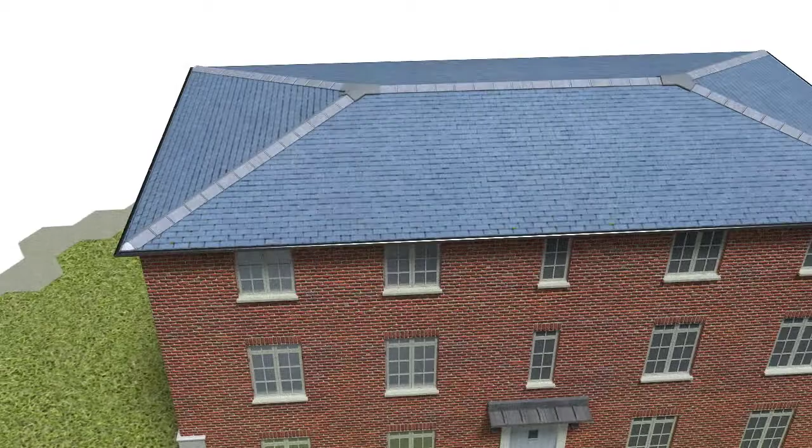Installing a high-performance structural floor is quick and simple when you use TETRiS insulation blocks developed by Cellecta and precast concrete beams manufactured by Charcon. Build up the foundation walls to the desired height. Install a damp-proof course below the beams.

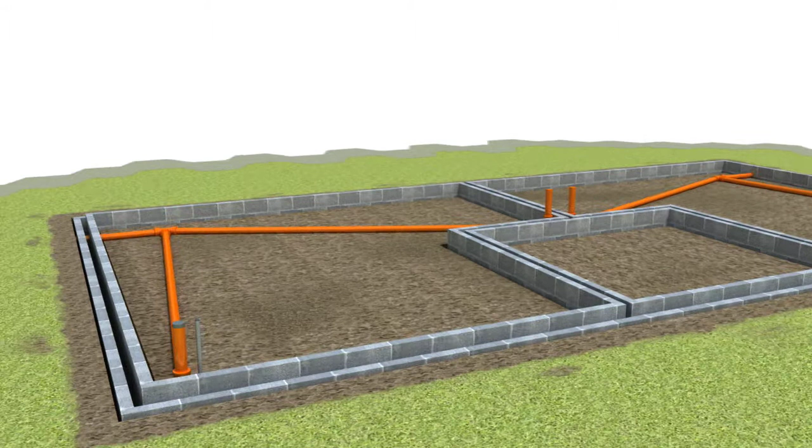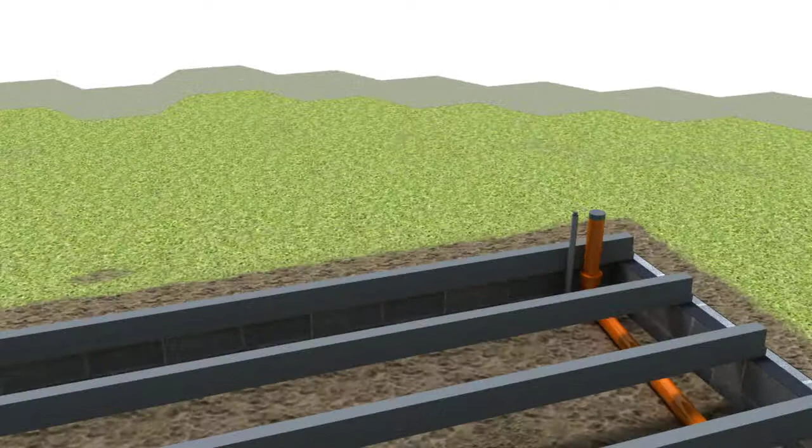Using the Charcon beam layout plan provided, carefully place the Charcon beams across the floor at the appropriate centers. In accordance with the layout plan, start with a full TETRiS T-block. Cut out holes for service with a handsaw.

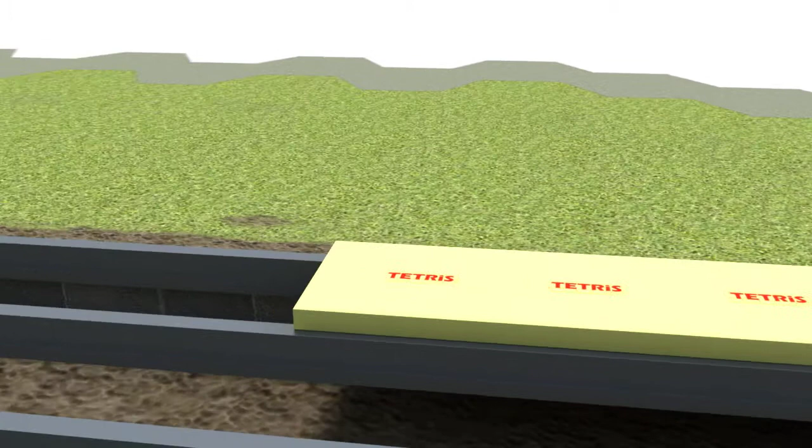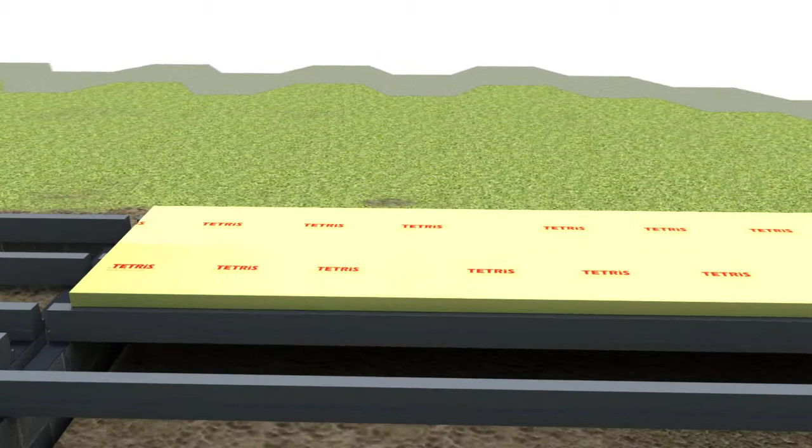Cut the TETRiS blocks to length with a handsaw. Use the offcut to start the next row and install the TETRiS blocks in a staggered formation. Where beams are set at centers that do not match the width of a TETRiS T-block, use a concrete block to bridge the beams and cover with a TETRiS gap strip.

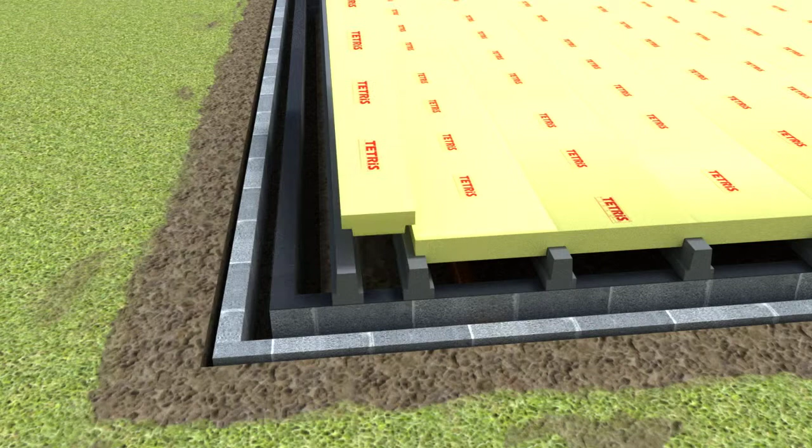Where required, install 300 mm wide TETRiS T-blocks. Cover the floor with TETRiS blocks. When beams are positioned away from the wall, install slip bricks and bridge the gap with concrete blocks.

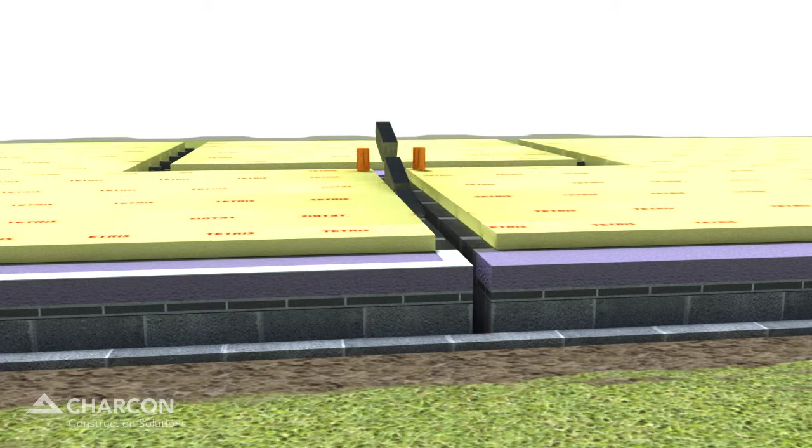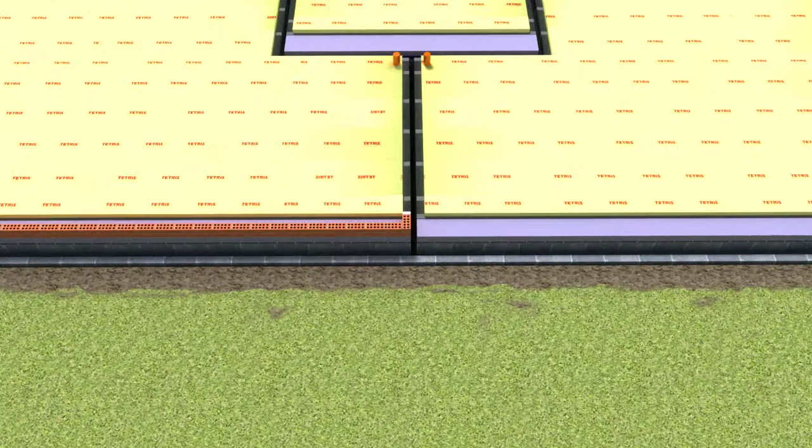Fill the gaps at the end of the beams with Charcon closer blocks and install the perimeter wall 150 mm high. Cut TETRiS gap strips to suit with a handsaw and cover the concrete blocks.

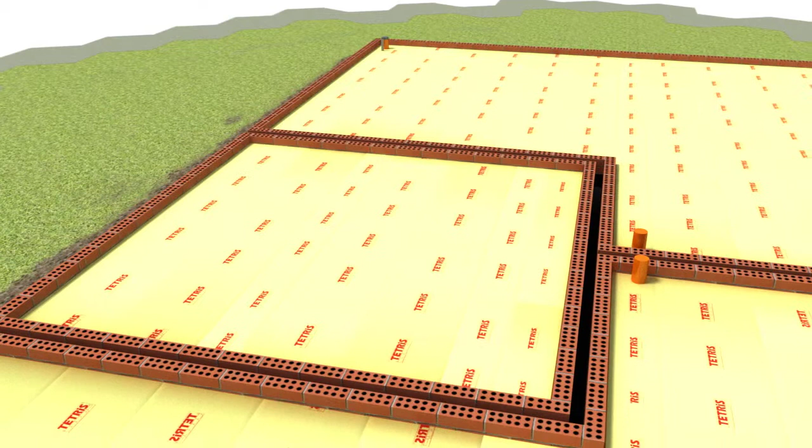Cover any exposed beams with TETRiS gap strip and install the TETRiS vertical upstand strip around the external walls and secure with TETRiS pins. A TETRiS covered floor is strong enough to withstand foot traffic, allowing the concrete topping to be safely installed.

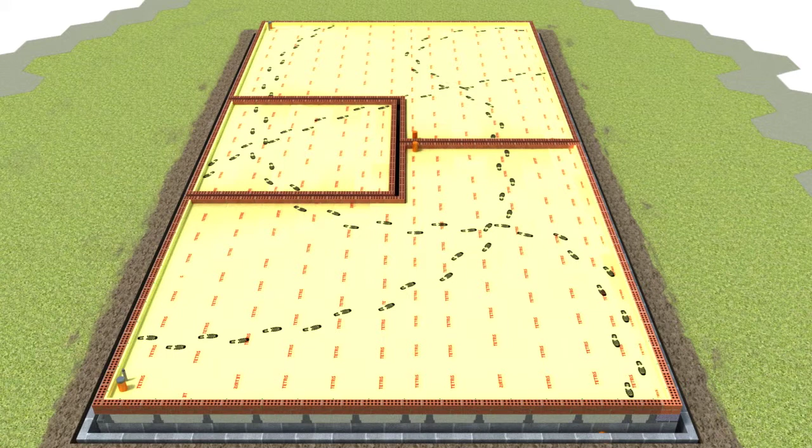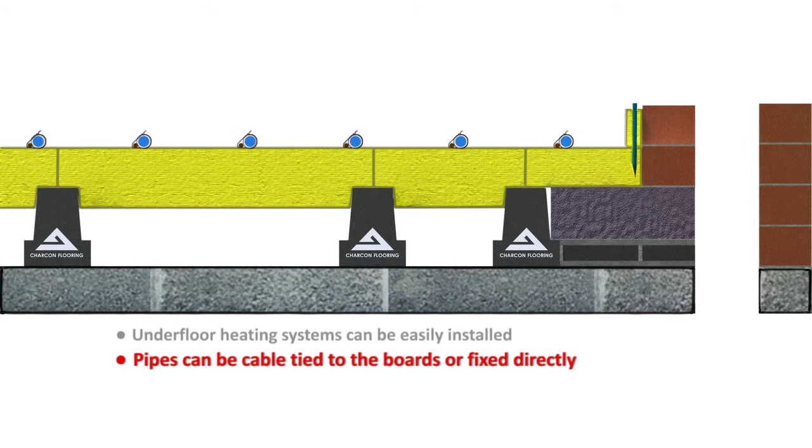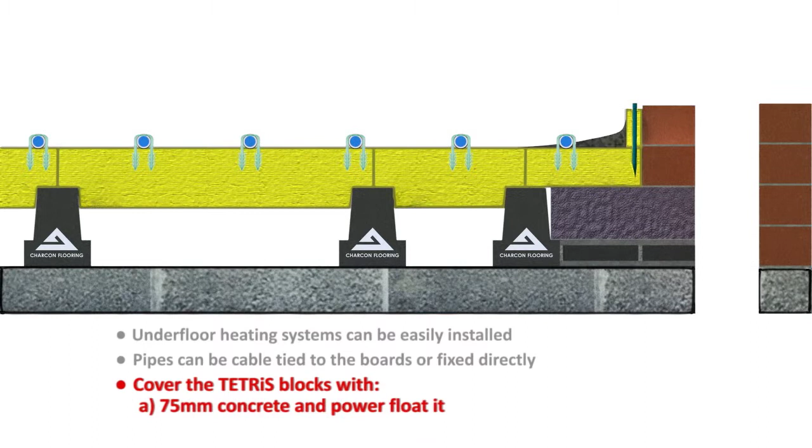Underfloor heating systems can be easily installed. Either cable tie the pipes to the boards, or alternatively, pipes can be secured directly to the TETRiS blocks with suitable fixings. Cover the TETRiS blocks with a 75 mm concrete and power float it, or use a free-flowing self-compacting concrete to produce a smooth finished floor.

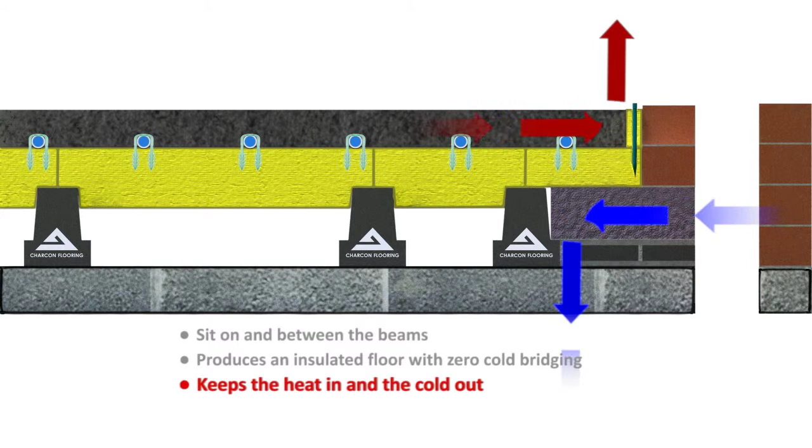The TETRiS blocks sit on and between the beams to produce an insulated floor with zero cold bridges, keeping the heat in and the cold out. Once completed, TETRiS will provide a floor with outstanding thermal performance and structural integrity.

TETRiS components and fixing tools. TETRiS T600 boards. TETRiS T300 boards. TETRiS gap strip. TETRiS vertical edge strip. TETRiS fixing pins. Charcon concrete closer blocks. Charcon pre-stressed concrete floor beams.

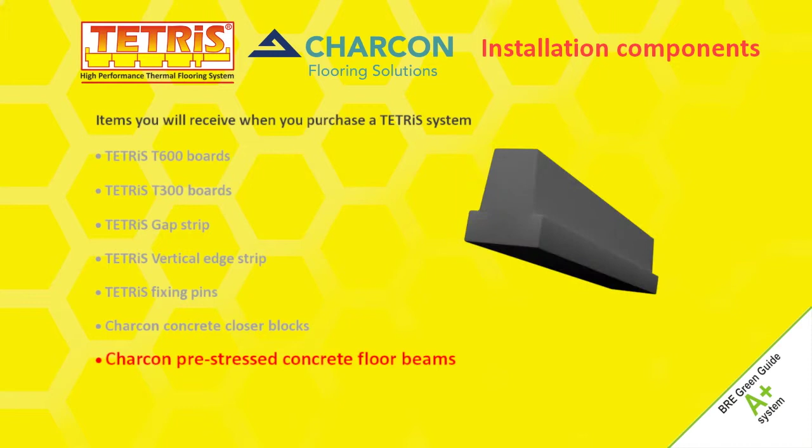Why use TETRiS instead of beam and concrete block? Quicker to install, up to 16 times less blocks to install. TETRiS is a BRE A+ Green Guide rated system compared to only a B for beam and concrete blocks. 3 times more code credits awarded. Insulation blocks are 100% recyclable. System supplied to site in floor-specific quantities. Reduces the number of beams required. More cost-effective.

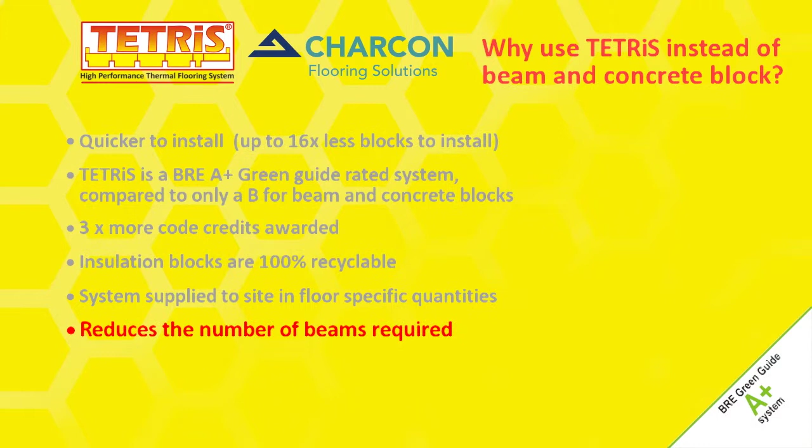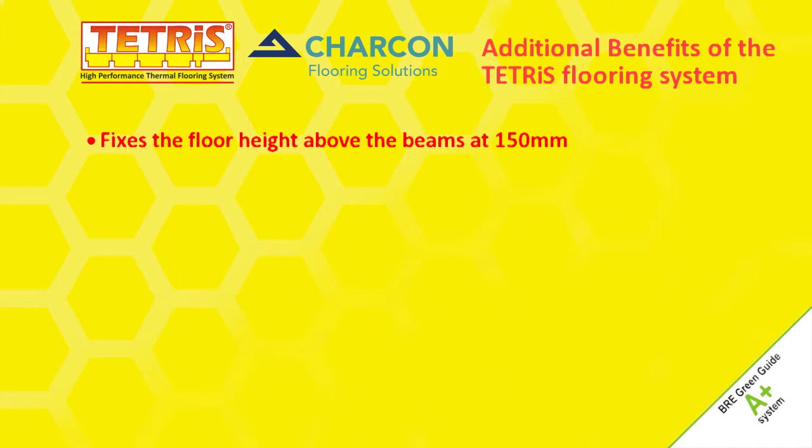Additional benefits of the TETRiS flooring system. Fixes the floor height above the beams at 150 mm. Underfloor heating system easily incorporated, able to withstand foot traffic during the construction process. Insulation integrity guaranteed. Zero cold bridging. Accredited construction detail. U values as low as 0.1.